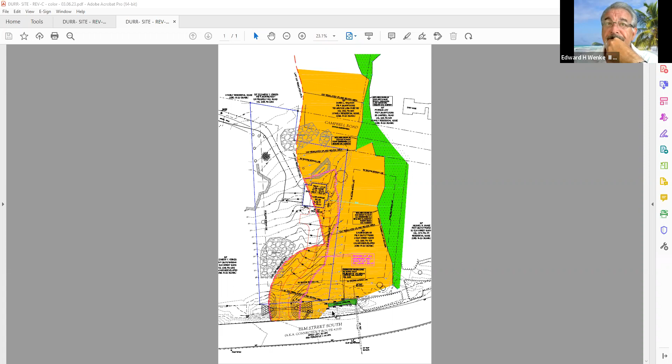For the record, my name is Joseph Theroux. I'm a consulting soil scientist.

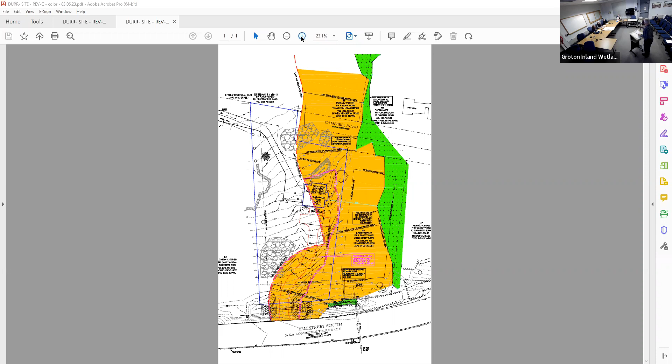On February 22nd, as Ed mentioned, I went out and took a look at what I'll call a trench, or swale, that runs along Elm Street South. What I found was on the eastern portion of that property boundary, an intermittent water course which flows to the west. It enters that 24-inch concrete pipe shown on the plan.

Because that intermittent water course has to make literally a 90-degree turn to get into that pipe, some of the flows bypass that and build up on the western end of what I delineated there. One of the other issues is, I think...

Can you explain what you just said a little more clearly? So where is it doing the 90-degree turn? What I found is that it flows down this way, turns 90 degrees, and goes into that pipe. But what happens is, normally during high flow situations, a lot of that water backs up to this point right here.

So the flows are coming this way, the stream turns and goes this way, but all that water can't get into the pipe at once. It may back up further, depending on the storm event. It does go through the pipe, but when I was there the other day, there were a lot of sticks and debris partially blocking it.

So is that wetland soil? Yes, in that green portion I delineated, technically it is an intermittent water course, but it is also wetland soils in there. So the plan does need to be amended, because it says no hydric soils, which is technically not correct. There are hydric wetland soils in there. Water stays there long enough to change the characteristics of the soil to become wetland soils.

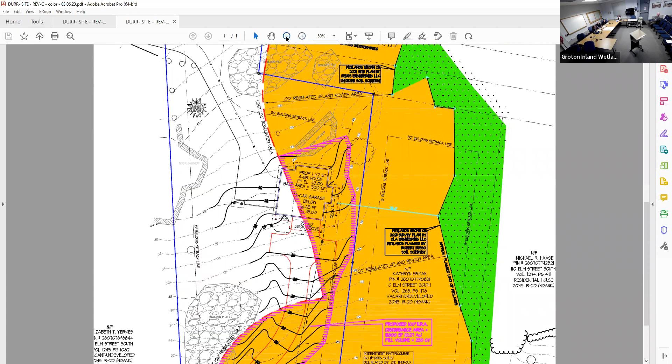That's good news, Ed. Can I ask about... I don't think I fully appreciated how much of this house is in the upland review area. And I am wondering why you can't move that over to the area that's not upland review area.

Boy, I knew you were going to ask that question. The house area location was dictated by the owner. We had looked at a couple different locations, but what's driving the house location from his perspective is he was talking with his neighbors in the back, and they did not want him building on this side of the site because they didn't want him blocking their views and vistas. So that's what was driving the house to the east into the upland review area, which, by the way, we didn't know was an upland review area before we modified this plan.

Having said that, from an engineering standpoint, if we were to move this over here, I start catching the higher grades a lot quicker coming from Elm Street on up, which makes the driveway a lot steeper. So in order to alleviate that steepness, we'd have a whole lot more cutting and grading up in this area, and it could get a little dicey. I don't know that I'd actually be able to make a 15% driveway grade, which is the maximum we're trying to hold at this point. Plus, we have this huge boulder pile that is not planned on being moved.

So the driveway location is going to be where it's going to be. If we were to move the house over in this area, we've got a view vista problem, and then we also have a steeper driveway issue. So that's where the house is right now, and I did confirm that with the owner today. We talked through this, and he said no, this is pretty much where him and all his neighbors agreed they want the house to be.

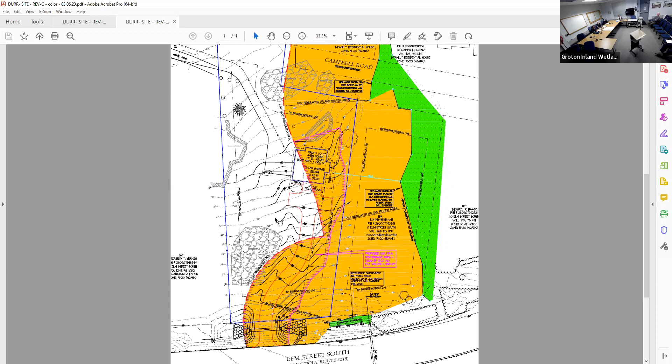Your point is certainly noted, but as you know, and we know so well, we're only supposed to look at the lines within the site that we're addressing. We're really, I mean, that's a big deal with all of this - you can never look at adjacent property. When that application for the adjacent site comes through, then that'll have to stand on its own. Oh, there's no question about it, but I just wanted to point that out.

So again, in terms of wetlands versus vistas, that probably doesn't hold a lot of weight for me in terms of wetland protection. And on the driveway grades, I guess I would like to really see something that shows me that you can't at least make a little bit more of an effort, even if you just tip that house, because like you said, you're at 75 feet.

If you even just tipped... is that west? East? Yeah, east. If you tip that eastern portion of it and kitty-corner it, sorry - I just see a lot of possible creative maneuvering of the structure that wouldn't impact the driveway. I'm not an engineer.

No, I understand, but are you suggesting that we move the entire house out of the upland review area, or are you saying we kind of twist it to minimize or reduce the amount of that encroachment? Just so I'm clear, I think certainly the former would be amazing, but the latter might be satisfactory for me, because I get the driveway part, but you see what I'm saying?

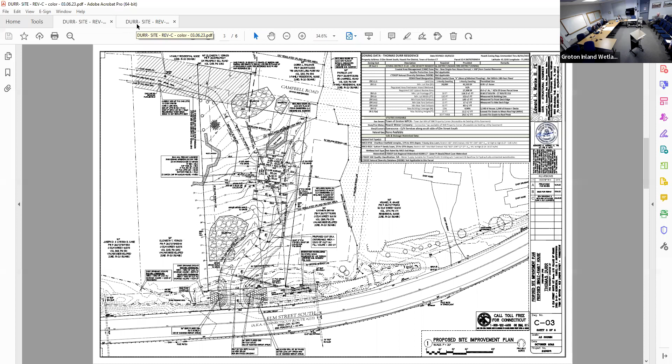A motion to classify the Durr driveway as minor. Second.

Discussion? None. All those in favor signify by saying aye. Aye. Okay, minor. Appreciate that.

So the next step on this is for us to revisit this house location and come back to you at the next meeting. That sounds right. Ed, you and I can talk, just to make sure we have enough time before that. I'll be able to review it once you make the revisions, and any of the other parties that had comments can review it in time for the next meeting, but we can chat about that.

Okay, no worries. Joe, thanks a lot for showing up tonight, I appreciate that. We didn't even hold it against you, Ed, that you're in a tropical place.

Thanks for getting that out. All right, thanks. All set? Thank you so much. Good talking, y'all. Thank you. Bye.

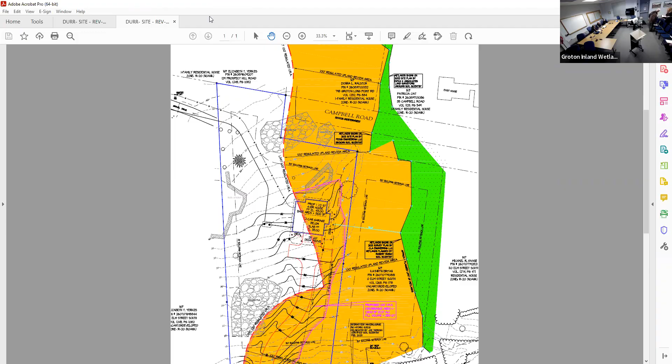So at the last meeting, we heard the application to remove the large tree that's out there and possibly reduce the upland, the non-disturbance area down to 25 feet. It was suggested by the agency members who were here that more detail needed to be added to the plan. There needed to be a planting scheme, having a wetland scientist or a soil scientist look at it and propose appropriate plantings would be a good idea. And so to that end, as you saw today, we just got it today - Jim Cowan has taken a look at it and made a proposal. But for right now, we want to walk them through it.

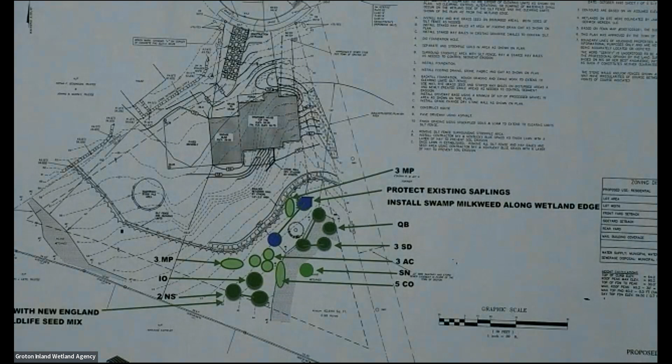All right, I'm just gonna put the camera on. Talk to this or talk over here? Hang on, probably come up here to show us maybe. Can you make it bigger? Yeah, I'm looking to do that. Dave, can you do that? I don't remember which button it is. Is Dave sick? No, he's just not in town. Spotlight, right? There we go. Okay, let me just zoom in a little bit. Oh, man, well done, Deb. Technology, amazing, great. There we go, if we can get it a little tighter, that would be good.

Okay, go to it. So my name is Paul Lucier, I'm the builder at 49 Prospect Street. I think I've met you all before a year ago. And when we originally applied, you gave us 40 feet of setback, which was, I thought, very generous. What we've now found is that the tree, which we were just talking about, none of us really noticed it when we did the site walk originally, but that tree has a big wedge in the middle.

I just looked at it today. So we've had a couple of arborists out - matter of fact, I was with one again out there today. Everyone, Jim Cowan, everyone agrees the tree should come down, but it should be cut off right at the surface of the ground so we don't disturb the wetland. Not to mention, I didn't realize a tree will still live even when you cut it down, to the stump. So part of the reason why the trees are good for that area was because it was absorbing a lot of the water, good for the wetland. So that will continue.

And we're also proposing, through Jim - and I did a nice site walk out there last week, then we came in and talked with Deb - and Jim created this great plan of all these different plantings. I'm learning a lot about things, I'm a home builder, I don't know much about wetlands, but I'm learning a lot. There's a lot of rocks, but there's a lot of what they call phragmites all through here, a lot of brush and heavy thickets of prickers and that type of stuff. I don't know exactly what they call all those things, but Jim has written a pretty detailed couple of pages of how we wanted to deal with that. The idea would be to take the tree down.

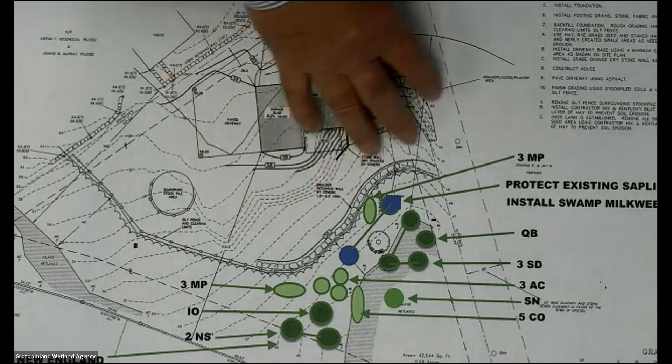That gives us a little more room to work around the back of the house with machines. We can grade things a little easier so that we don't have as quick a slope. And this wall really is only going to be one rock tall.

Some of these rocks are pretty big, but about 3 feet, so it's going to be a really gentle wall. The wall comes around and kind of dies into the grade here, which allows us to maintain these plantings that Jim is suggesting we put in. That's about it, I think.

So let me just get this straight - is the idea of the 25 feet actually to accommodate the trees that are there, or is it simply for something else? It's really more for the grading, for the grading and the lawn. Yeah, it's more for the lawn.

And I'm having trouble with that part of it. I thought the planting plan was good, fabulous - there are wonderful choices.

Right here, this is a really heavy area of phragmites, and that's the area that's just below our current line. We have a silt fence that wraps around at the 40. Yeah, I saw that.

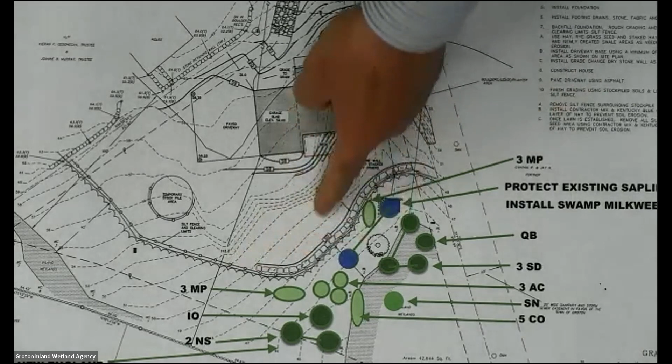Just on the other side of that, so that's going to need to be dealt with one way or the other. If we stayed at 25 feet, it wouldn't be the end of the world, and at 40 feet it wouldn't be the end of the world either, but it would give us a little more room.

The fact you have phragmites has nothing to do with that wall - zero, really. That's going to be dealt with by cutting them and painting the stems, correct. We're not going to dig them - that has nothing to do with that. Correct.

It's a pretty serious grade too. It is, and that's why we were trying to push it back a little bit so we could grade a little slower too. And I thought - remind me, in the field, you were out there today, Barbara.

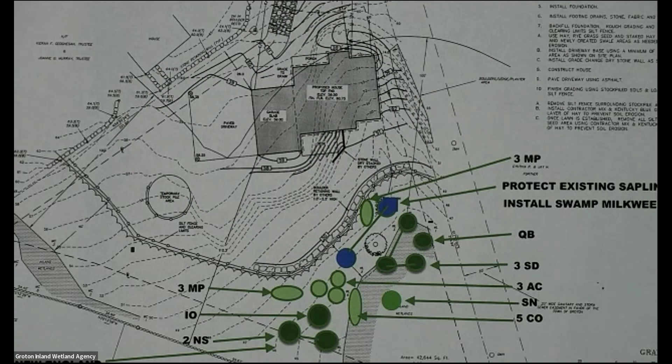Wasn't there some sort of natural delineation out there, or is that another site I'm thinking of? No, you're right, it's right through here - there's basically almost a water course of its own that runs right through there.

I remember having a lot of concern about that particular place where you're proposing the 25 feet. I'm not loving that. That's why we're asking. Yeah, I'm not a fan of giving away that distance.

I guess I'm wondering if you went with a 40 foot, it would still be pretty much the same. Yes, the grading would change a little bit, but otherwise those rocks could also be used. Absolutely, like just where you have silt, one way or the other, we'd use the rock.

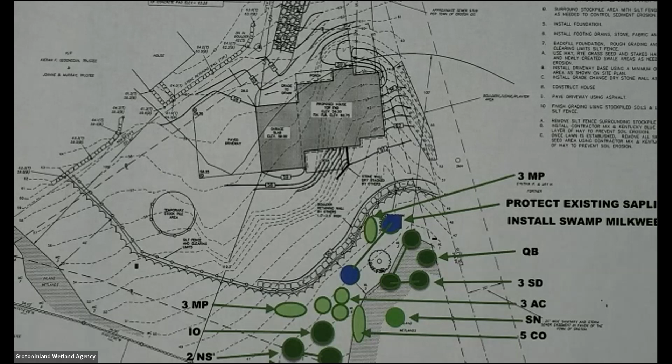What's the distance from the corner of the house to the 40-foot line right here? About 10 feet. So we don't really have a whole lot of space right through there.

Very tight. I'm thinking of machines and stuff. Well, that's what we're thinking, but we can deal with it. We'll do the small machine, but we'll need to put a big machine in there to move those giant rocks.

And how are you gonna get a big machine in there? Well, we can get a big machine in through here. We can reach pretty much everything we've got to reach, even with the 40.

And I think a lot of the boulders are up higher. Aren't they all on the upland areas, on the other side? Yeah, we basically stockpiled all through this area.

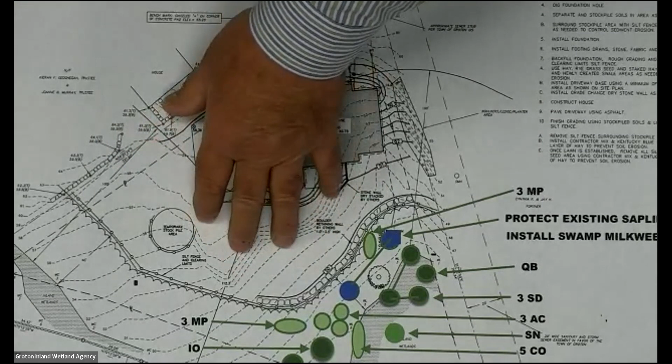And we hauled off a lot of rocks, and then at some point we said we've got to stop hauling off rocks, maybe we use these. So we stopped and said let's find out what we can do, and once we know what we can do, do it, and then we'll haul off whatever we don't need.

So what do you think? You want to hold the 40 or you want to go to 35? Well, I was thinking that's a nice compromise, because didn't we also have a letter from an adjacent property owner?

Oh yeah, and she spoke about the tree getting cut down. That was last year, so I think she came out fine with that, and she's now in favor of the tree situation.

I don't think I included it, it was Cindy Fortner who spoke last time, and then at the end she handed in what she essentially had read. I don't think I included that in your packet, but I will.

When we originally applied for this last year, they really didn't want us to cut the tree down, for a lot of reasons - the absorption, the shade. So there was, I agreed, it's a good tree.

Problem is, it's not a good tree. No, it isn't, and I think she agreed with that, as did I remember. She did, a couple weeks ago, she said...

Concerned with the amount of plantings that you were going to do and whether or not they were appropriate, and whether they're all native plants. We had basically gone to a gardening place, they gave us their opinion.

Now we went to Jim Cowen, so now we've got a real soil scientist, what works there. And then we went to All Habitat, which now gives us some real people that know what they're talking about with this area, so I feel really confident.

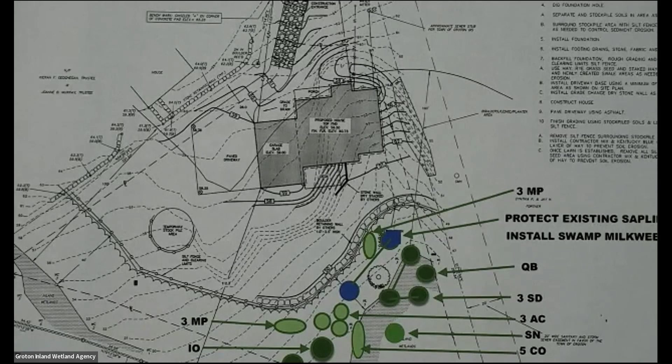I had printed this out, but I was able to magnify it on my computer so I could see what they were doing. So that was good. All right, I don't really have anything.

It's almost a good time to go out, run around town and check all the building sites. I've been looking at a couple of them, but I don't see anything too egregious going on.

Welcome back, you two. How was it without us? It was terrible, a lot of pressure. I tried, I couldn't remember people's names, and that kind of sprung it on me. I didn't realize both of you were gonna be gone. But it was all right, fine. Annie said you did great.

That project behind me, they've taken a lot of the trees out of there and got the road cut through now. They're on Allen Street, they've got one building permit, but it's a driveway. They're also installing the sewer from Pequot to that house.

I figured they're gonna bring the sewer into those 5 new houses. Yeah, it will be on municipal sewer, coming from Pequot, not off of Allen. Boy, that'll make them really close to me now. Oh no, they're not extending it, they're just tapping into the existing sewer in Pequot.